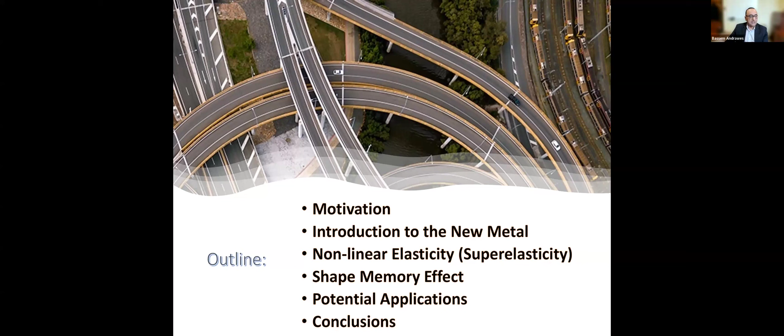Rather than focusing on one particular application, I chose to go through an overview of some samples of the work we have been doing through TRANS-IPIC, especially here at the University of Illinois, related to SMAs, which would hopefully give you an idea about the potential of these new materials. Then I'm going to wrap up with the conclusions, of course.

Starting with the motivation, really the motivation is the dire condition of our transportation infrastructure. It's no secret that we are in need of reshaping the future of our infrastructure if we want things to be a little bit different a few decades down the road. The numbers highlighted here in red are just a few examples of the condition our infrastructure is suffering from. Therefore, we see buzzwords like resiliency, sustainability, energy efficiency, durability. These are keywords floating around whenever we attend a meeting, workshop, or conference, and they are very important keywords that we need to think about very carefully.

We need to think about innovative ideas and technologies for the future. Of course, we can't just keep repeating the same technologies and expect the outcome to be different 50 or 60 years from now. Therefore, we are thinking about new materials, and that's the area I'm going to be focusing on today.

If I ask you a simple question, what would be the most used material in our transportation infrastructure? I'm sure most of you will say concrete and steel, and you're not wrong about that. You're absolutely right. However, these materials are great and have served us well over the last century, even more. But it's not a secret that they have their own shortcomings and limitations. For example, concrete cracks in tension, steel corrodes, and concrete cracking even exacerbates the issue of steel corrosion.

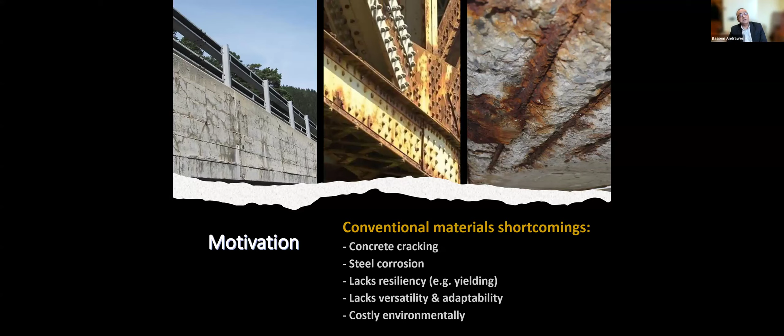Therefore, we started thinking about emerging and new materials like shape memory alloys. Let me declare very early on in my presentation, we are not suggesting or proposing to replace existing reinforcement with these metals or materials, but rather supplement reinforcement with these materials. Hopefully the examples I'll share with you today will highlight exactly what I mean by that.

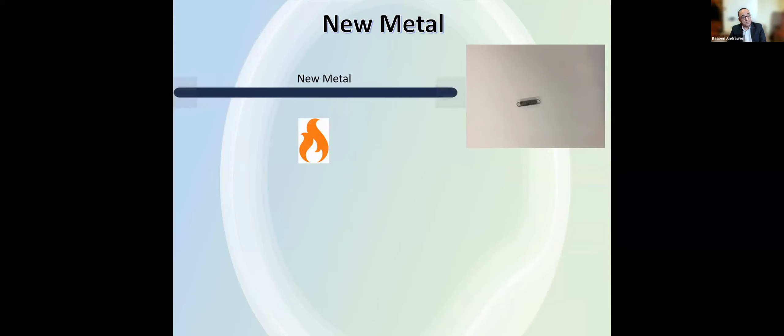So when we say new metal or SMAs, if you see it, if you feel it, it looks like any other metal. However, the unique thing about it is that if you deform it beyond its elastic range, the material can actually remember its original shape when subjected to temperature.

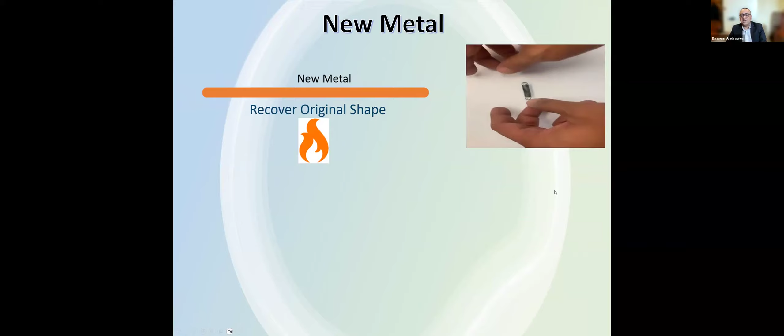If you haven't seen this in real life, I have a video here today that shows me stretching a spring made of SMA beyond its elastic range. You think it's permanently deformed. However, wait until you see what happens when I subject it to some heat through this flame. It immediately starts recovering its original shape. The thing about it is that it can do this over and over again, the same spring, so it's a repeatable process.

SMAs are not new. They have been out there, used in high-end fields for decades now—fields like aerospace, biomedical, robotics. And they are becoming more popular than ever when it comes to their commercial availability. They are found in the form of wires, bars, sheets.

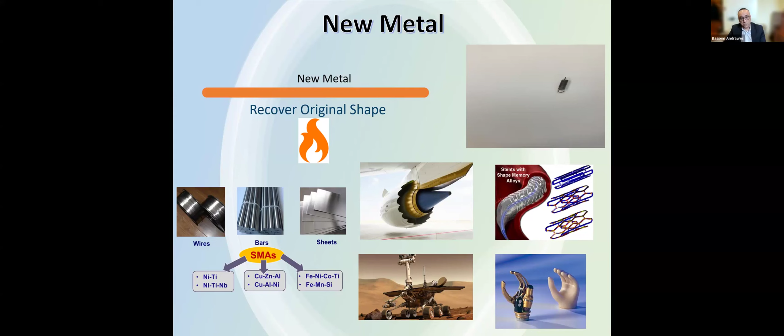One important thing I want to point out is that SMA is not one type of material. It's actually a group or family of materials that exhibit more or less similar behaviors. For example, we have the nickel titanium family, which nitinol comes from—the most popular commercially available alloy out in the market. And now we also have copper-based alloys, iron-based alloys, which really got civil engineering folks excited about using SMAs because they are more cost-effective. Our role here in civil engineering is to choose the right alloy, or alloys, that work for us in civil engineering applications, not only from cost, but durability and resiliency as well.

Let's delve a little deeper into the mechanical properties of these materials. First, I want to make it very clear that when you say SMAs, you have to identify what type of SMA you're referring to—is it superelastic or shape memory? They are completely two distinct behaviors that cannot coexist, by the way, and I sometimes see confusion about these issues.

For example, when you look here at the left side of the slide, you see this nice flag-shaped hysteresis—that's the superelastic behavior. There is what looks like a yielding point, there is a plateau, there is ductility, there is energy dissipation. But when you remove the load, the material bounces back and goes to zero strain, giving us this nice flag shape hysteresis. Some people refer to it as pseudoelasticity or superelasticity. I sometimes like to refer to it as nonlinear elasticity.

We're used to the terms linear elastic or nonlinear plastic. Nonlinear elastic is not a very common term to use, but this is actually what it is. It has all the features from damping to self-centering to ductility that excite earthquake engineers and researchers studying and using it, and that's what it's very popular for. So most of the studies out there you'll find on that type of alloy are for earthquake engineering applications. The less studied one, but now there's growing interest in using and applying it, is the one on the right here.

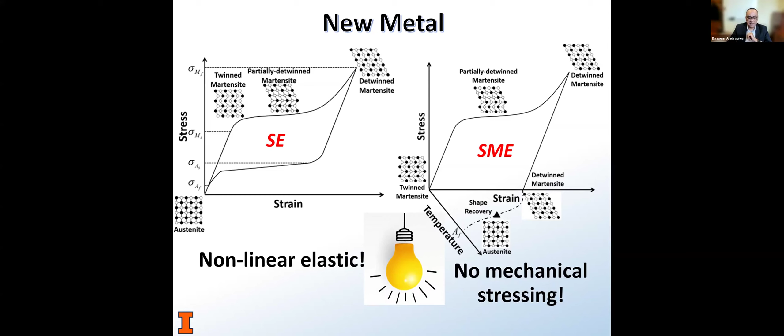The great thing about this, though, is that if you subject it to that temperature while restraining it, it will pull back very strongly, trying to remember its shape. That force developed during this pulling process is called the recovery force or the recovery stress. It really triggered in many minds the idea of using it for pre-stressing, thermal pre-stressing, without need for hydraulic jacking or any anchorage system. That's the unique thing about this, and hopefully in the examples I'm going to be showing you today, you will understand what I mean.

Going back to the superelasticity, for those who are not sure about the self-centering capability, what does this mean? This is a simple beam. We're subjecting it to bending. It has two SMA superelastic bars inside. Look at the crack forming in the middle.

That's expected, of course. But wait until you see when we remove the load, because it's cyclic loading, the crack will start closing. That's what we mean by self-centering. The beam is actually having the ability to recover back to and bounce to its original shape. See how wide the crack opens? You think it's done, but when the load is removed, watch the crack - it's closing. That's the beauty about the self-centering or recentering.

You also look here at the CMOD, that's the crack mouth opening displacement. It started taking that nice flag shape hysteresis. Eventually it failed in shear because we didn't actually plan to design it to have shear reinforcement. But you got my point.

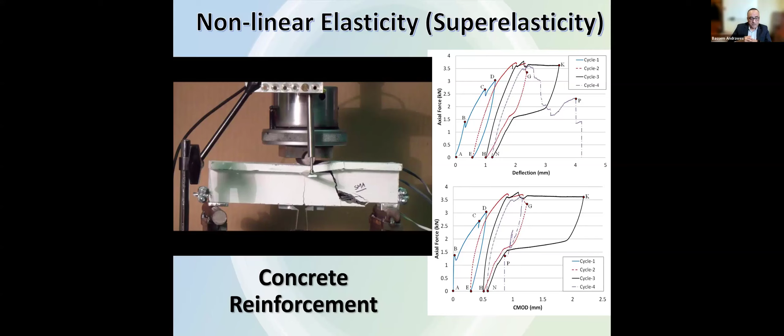So self-centering has found its way in applications like rebars and plastic hinges for bridge piers, or in moment-resisting frames, or even bracings for seismic frames. You will find a lot of research in that direction.

Switching to a little bit less studied and less understood phenomenon, the shape memory effect and how it could be used for thermal pre-stressing. Let us start with bridge piers. I'm showing a few examples of issues we have seen in the past, either during earthquakes or even issues with the construction of seismic structures, like high steel congestion. A lot of these problems could be attributed one way or another to the transverse reinforcement.

Now let me ask you this simple question. Can you imagine having a transverse reinforcement like a spiral, for example, or a strip inside a beam that is pre-stressed? How can you even start thinking about pre-stressing a spiral inside a column? Well, it's very difficult, and even if it's achievable, it's not a very simple process - until we started thinking about the thermal pre-stressing that we can use for doing that.

The process is very simple. We have pre-strained wires or bars made of SMA, delivered already to the site in the pre-strained condition. You form it as a spiral, put it in the form, and cast the concrete. When the concrete sets, you can now activate it by subjecting it to temperature. It will attempt to shrink, it will try to squeeze the concrete, and that squeezing effect we call lateral pre-stressing, transverse pre-stressing, or sometimes active confinement.

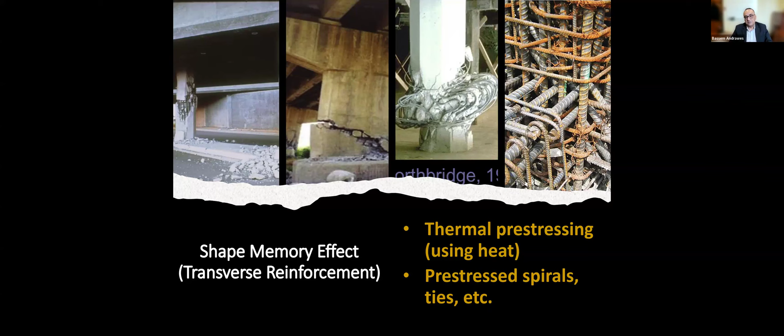So that is the unique thing about these materials. One could argue, how does active confinement really behave, or how does this differ from passive confinement, which is the conventional transverse reinforcement we're using? Well, I have this simple example here for you to compare both. We have two identical cylinders, identical in everything except that the wraps on the left are made of steel, and the wraps on the right are this SMA spiral.

So I'm going to run both of them simultaneously here. We conducted a cyclic compressive test, basically loading and unloading. I want you to start watching the progression of damage in both specimens. See here the shear diagonal cracks forming right away very quickly, and then boom, the fracture of the spiral.

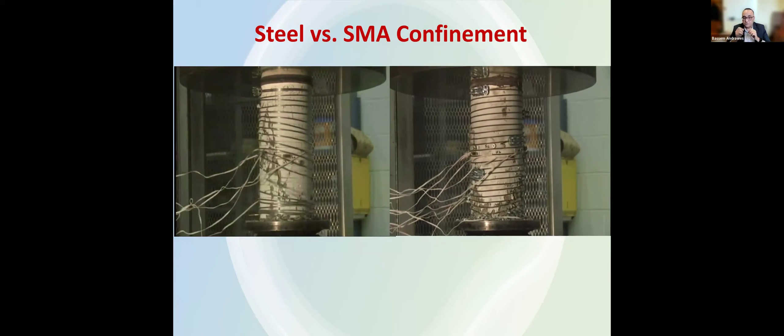While when you look here, I want you to watch the plate on the bottom just compressing, squeezing the concrete and unsqueezing - it's like a pillow. So before your own eyes, you can see the concrete being squeezed. Only a 2 millimeter diameter wire that you can wrap with one hand is able to do this to the concrete. By the way, this is not special concrete, it's just regular, normal 4 or 5 KSI concrete. The effect is significant.

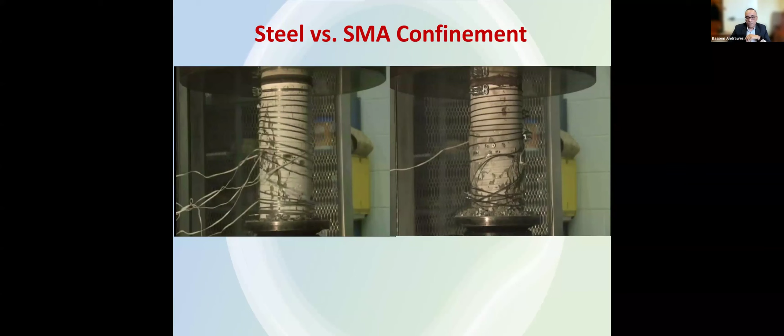There is some effect on the strength, as you can see from this stress-strain curve, but more importantly, the additional ultimate strain that we gained translates to additional ductility. So we wanted to look into this more deeply at the column level.

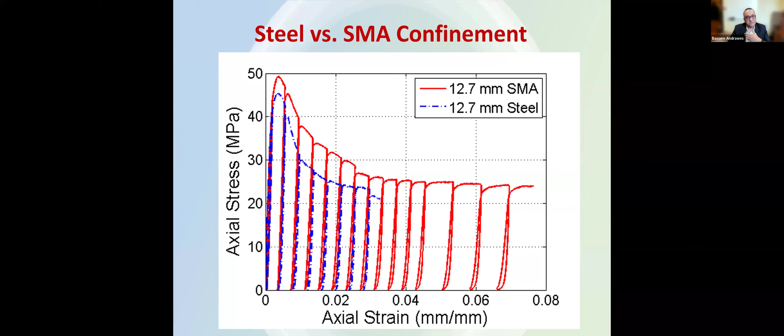We have two columns: the one on the left wrapped with the SMA spiral, again active confinement, and the one on the right with passive confinement using glass fiber reinforced polymer.

The FRP started well at the beginning. However, we started seeing early compression failures, crushing essentially of the concrete, and then what looks like an explosion at the plastic hinge of the columns.

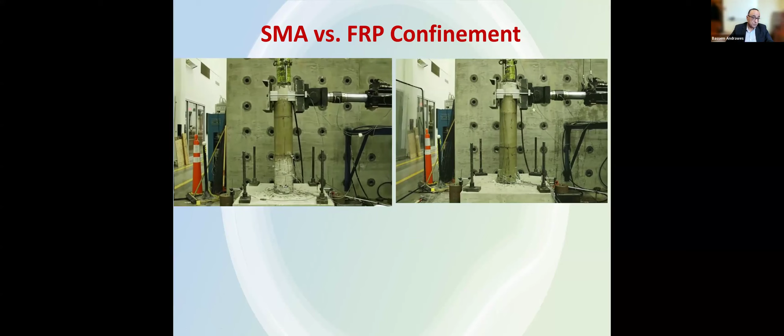While the one on the left, no matter how much we pushed it, we even maxed the stroke capacity of the actuator and still didn't see any fracture of the spiral or crushing of the concrete. That was an amazing amount of ductility that this column exhibited.

When we uncovered the columns and took all the wraps off to inspect the concrete underneath, for the FRP column almost half of the cross section was completely gone and unusable. While the one on the left had damages, it was in much better shape, which will affect post-earthquake functionality, repairs, downtime, and all the important decisions that bridge owners have to make after an event like an earthquake.

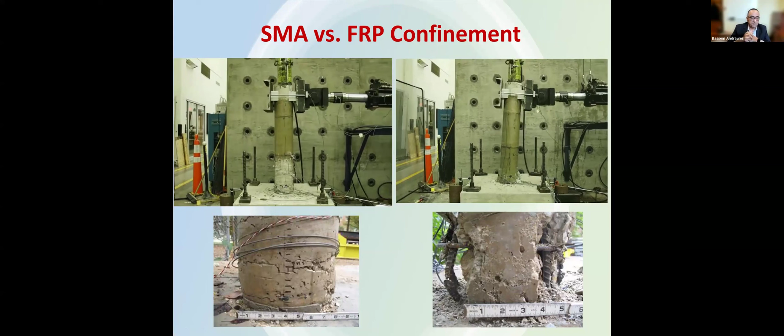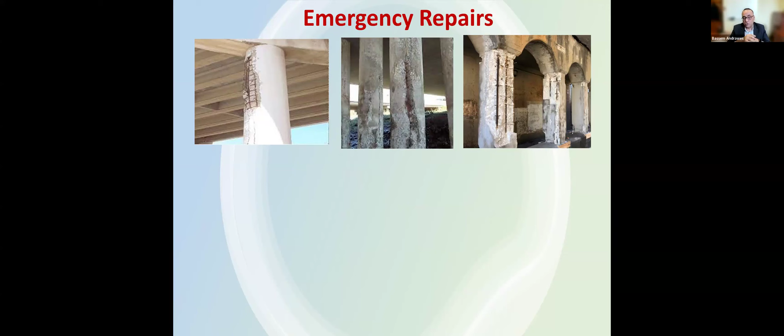Speaking of repairs, we started thinking about using these materials not for permanent repairs, but for emergency, quick, even temporary repairs after events like earthquakes or hurricanes. We know that requires a very quick act. So we wanted to test this concept in case a main shock hits a bridge and damages it, and you're not sure whether to keep it open for emergency vehicles or close it. We tested this with small SMA wires.

We had one of our bridge columns tested in our lab, severely damaged, with two of the rebars even fractured. So we coupled it with two couplers, injected epoxy in the cracks, applied fast-setting mortar, and then wrapped it with SMA at the plastic hinge zone.

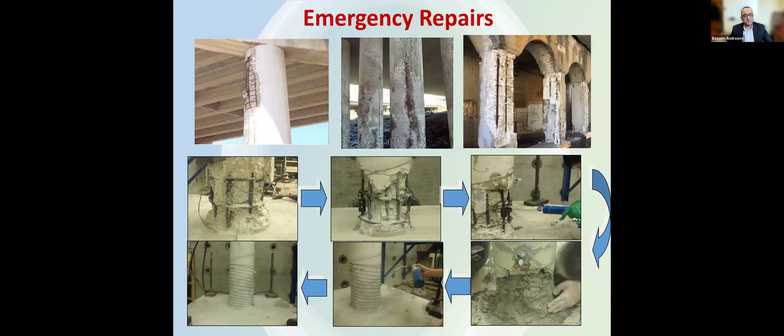Here my former student is applying a blowtorch, just heating it. In a matter of seconds, you see the spiral, even before your own eyes, attempting to squeeze the column and apply the confining pressure. So we wanted to test this concept under actual dynamic load effects.

The best way to do this is through a shake table test. That's actually the only way to do it right now in our labs. So we took one of the columns that was damaged, and the damage here is in the form of cover spalling and exposure of the internal steel hoops.

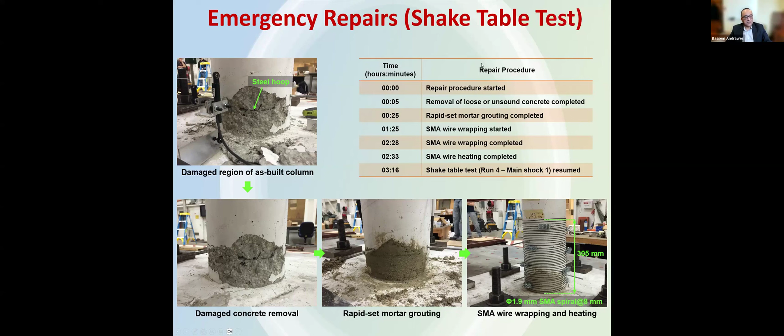We performed the repair process, and it took about 2.5 hours to complete. Then the column was ready for testing. We conducted tests on two columns at the same time. The top one was not damaged; that was retrofitted from the beginning. The bottom one, shown to the right, is damaged, then repaired, then tested.

We subjected both columns to a record, bi-directional record from the Loma Prieta earthquake. I want you to watch here how both columns behave together.

You will notice that both columns were behaving almost identically. The capacity of the damaged column was restored, and its ductility was improved significantly just with 2 millimeter wires in a 2.5 hour repair. That was a great successful test, showing the potential of these materials for active confinement.

Let us switch gears a little bit and talk about another important component in bridges: precast pre-stressed girders. One of the issues still lingering with these precast components is the transfer of the pre-stress and the effect it has on the end region.

We see in many cases, unfortunately, these end splitting cracks, especially in cross sections with skinny or thin webs and wider flanges where there's a lot of pre-stressing force transfer. There's been a lot of research in this area, so it's not a new problem, but there's no one quick 100% fix yet that satisfies everybody.

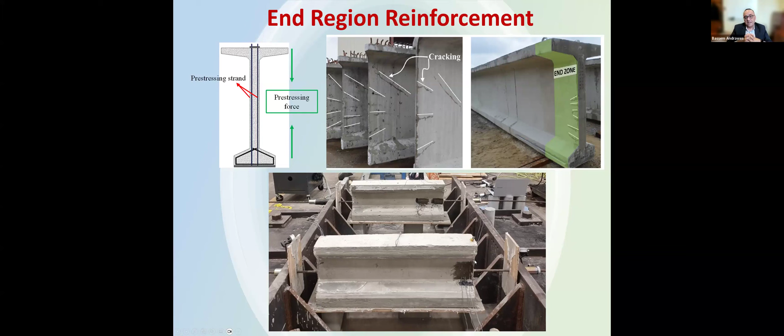We only used one stirrup, number 2 stirrup made of SMA, with 2 legs. We found that we are able to apply a transverse pre-stress that reaches about 0.9 KSI or so, which our analysis showed is enough to almost eliminate all the transverse or splitting cracks we see.

We are actually going to be presenting on this topic next month at the ASCE Structures Congress, and we're now pursuing more testing to validate this concept.

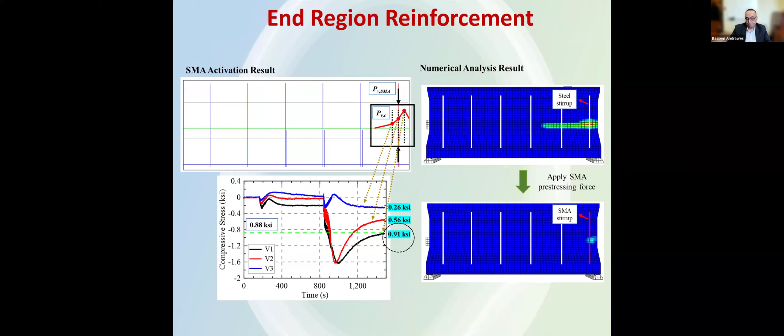End region is not only a problem during pre-stress transfer. We see this all the time in existing bridges, actually due to the leaking of de-icing material or water through the joints, the bridge hinges.

Now the question: should we replace the beam? Can we restore the capacity of the beam? DOTs and agencies, transportation agencies, are faced with these questions all the time.

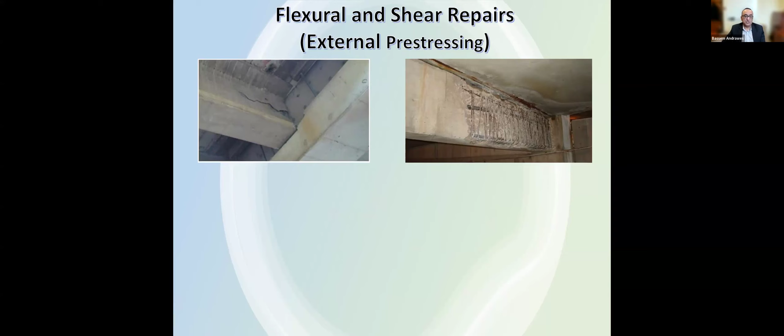External pre-stressing is one of the great techniques for restoring capacity. However, for a tight region like this, it becomes very, very difficult because of the need for large equipment, hydraulic jacking equipment, and even anchorage blocks.

So we came up with a very simple concept. It's called precast pre-stressing plate, the PPP concept, where we basically have a precast plate fabricated somewhere else, having a coil, if you will, of SMA that's pre-strained, not activated yet. You place it in that plate. You ship it to the site, you mount it or attach it to the surface of the concrete where it's needed repair or strengthening. For example, here it could be a web or it could be a flange.

It could be a very tight region because really you don't need any anchorage block or system. Once it's ready, you apply the pre-stressing force by just simply heating the wire inside the plate. The pre-stress transfers to the substrate or the surface underneath.

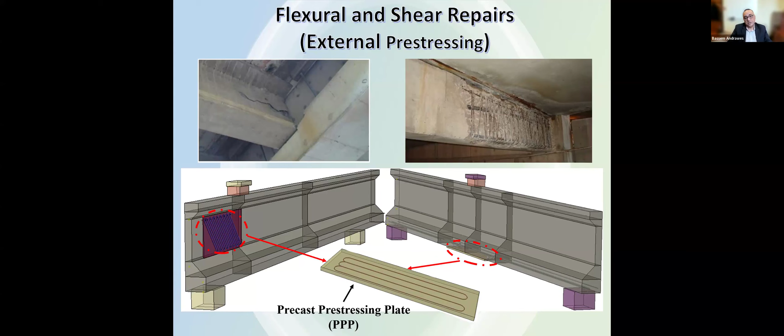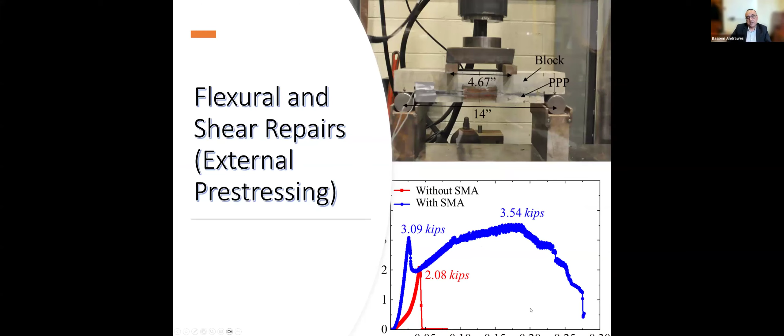When we activated the 4 wires, we found quite a bit of pre-stress transferring to the block underneath, and that was a very great outcome. We even tested that block in flexure, as you can see, and the strength and ductility both improved tremendously, showing improved behavior there because of the pre-stressing that's transferred.

The most recent test we conducted was a large-scale test using this same concept with some variations. It's called the coupled pre-stressing plate, or the CPP. And this, I would say, is the first test of that size, that scale, using SMAs done in the US.

Basically, the idea is very simple. We have here 2 plates. They are not connected, but they are coupled with the SMA reinforcement that's running in between them. And these are precast plates. We can also supplement the reinforcement with some steel just to cut down on the cost of the material of the SMA.

You simply attach these plates to the soffit, in this case of a PPC deck beam. Essentially, it's a box beam with some cracks in it, and we wanted to repair it, strengthen it, essentially. So here we used epoxy with some anchorage applied as well.

And once it's ready, we just activated with the blowtorch, as I told you before. And in a matter of seconds, actually, the pre-stress is transferred to the bottom of the beam, and we were able to see cracks closing, and we were able to see an increase in the elastic capacity by over 50%.

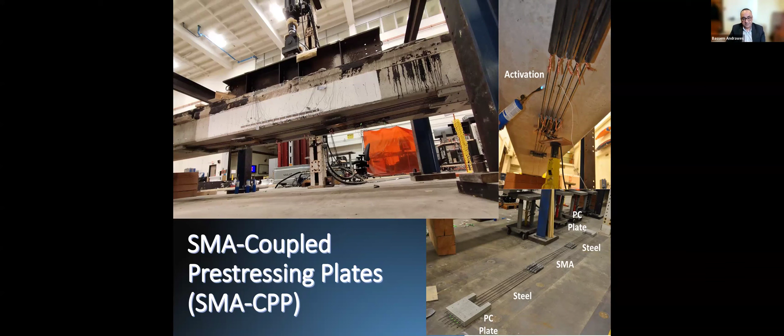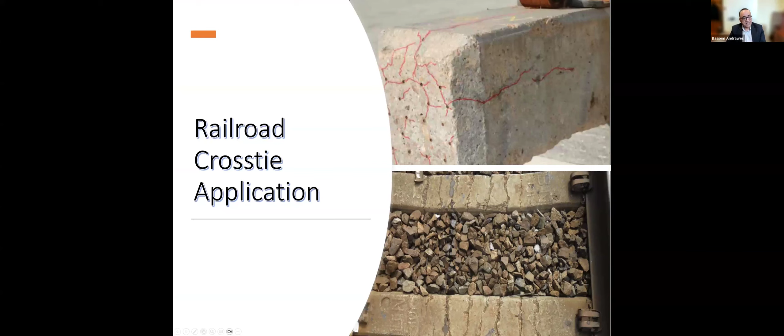So we started actually having discussions with experts in this area. Especially we started working with Rocla Concrete Tie, one of the leaders in developing these ties in North America. And we told them, how about if you eliminate the top layer of your post-tensioning wires? That will help, of course, alleviate some of the stress at the end zones, which will help with the end splitting crack issue that they have.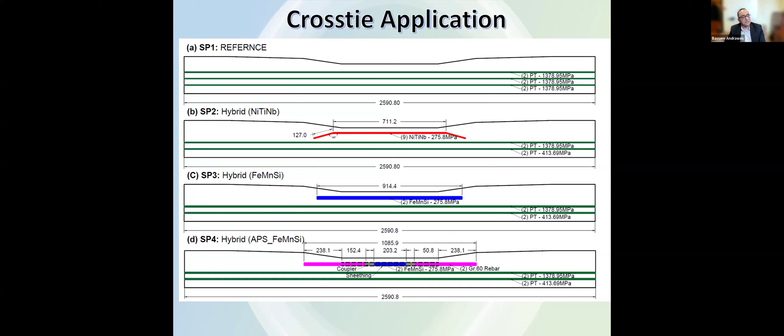And then we could also add just localized pre-stressing using SMA bars just at the center region. We tried different configurations. We visited their plant in Florida for a couple of days, and we worked with them on implementing this technology in their ties. And once the concrete was cast and set, they shipped it to us for testing.

It was very, very fruitful, an exciting experience we had with Rocla Concrete Tie. Now, the question that probably some of you might be wondering about is, okay, now you have the SMA inside the concrete, everything is great, but how are you going to heat it up? The quick answer will be, well, we're going to have some cables just connected to the SMA sticking out of the forms. And when we need to heat it, we just connect it to a power supply and electrical resistivity will do its job, right? Yes, but we wanted something that is less complex and much simpler.

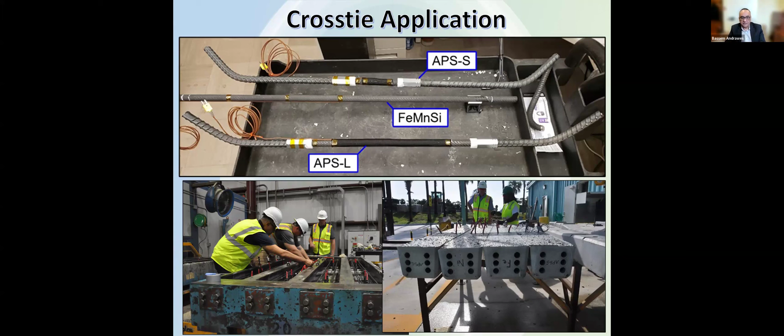And we thought about induction heating. Some of you might be familiar with this technology. The idea is very simple. You have this coil that generates an electromagnetic field. And if a magnetic metal happens to exist in that field, then it will actually run a current in it, and that will heat up the material. So we're able, for example, just by scanning the top surface of this concrete block, to heat the bar inside and make it reach about 200 or 300 even degrees Celsius in a matter of a few minutes.

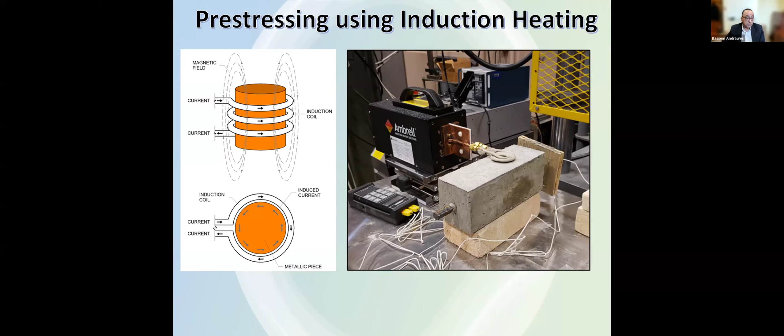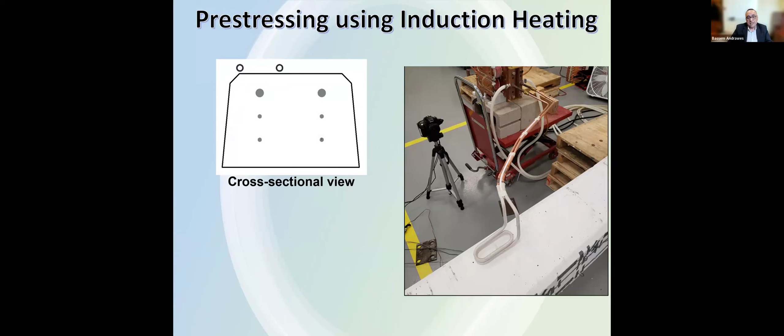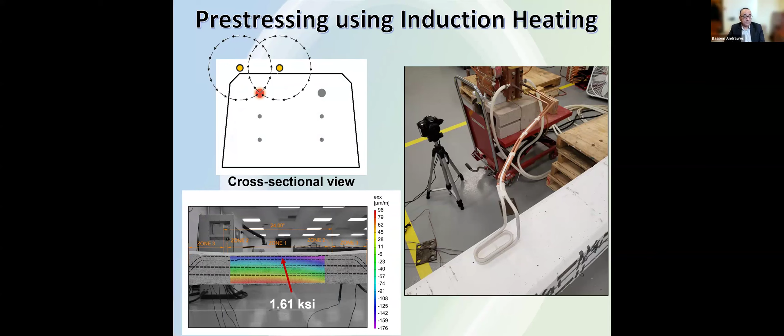So that was an exciting technology that we wanted to explore in TRANS-IPIC. And what we did was basically we heated the SMA inside of these ties with this coil. We were able not only that, but just by scanning the top surface of the concrete without even touching the SMA inside, to reach pre-stress at the top fiber as high as 1.61 KSI, which resulted in a moment cracking capacity that exceeds even the AREMA requirement. So that was a very exciting thing to see here.

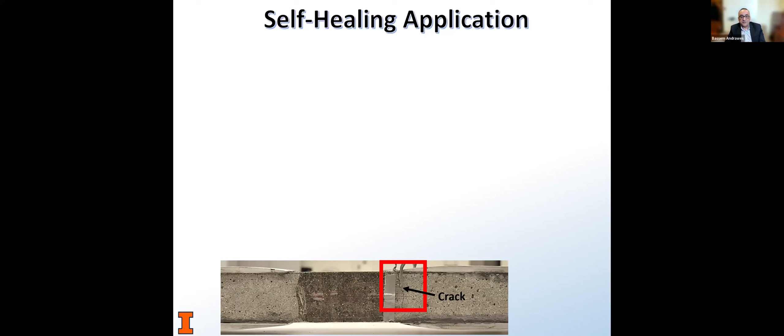The same concept could be applied for self-healing, something that we've been thinking about. There's been a lot of studies about this in other areas, but now with SMA, imagine having a crack of this size, and you have SMA bars inside. Whether it's pre-stressed or not, if you heat it again, that's what happens. This is exactly a specimen with SMA inside, and we heated the SMA, and some of you might not even see where the crack is. And that, of course, will help significantly improve the durability of concrete.

So our group will be giving a talk next month also at the ASCE Structures Congress in Phoenix about these self-healing applications and research we've been doing with SMAs.

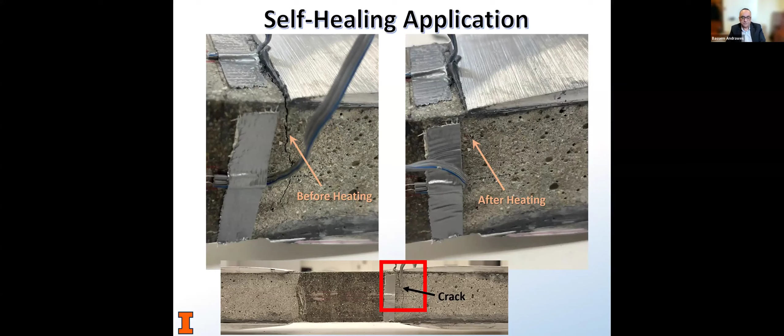The last thing I want to touch on, and I'm not going to spend much time because I know we're limited on time today, is design optimization using SMA pre-stressing. Now, in an era where 3D printing and additive manufacturing is growing significantly, showing us how we can produce more efficient and optimized cross-sections that used to be very complex to produce, we thought about applying this to conventional bridge girders like AASHTO girders, for example.

And with these zones being discrete like this, we cannot apply our conventional post-tensioning or pre-tensioning. But with thermal pre-stressing, it's becoming more and more actually feasible now to pre-stress these localized regions.

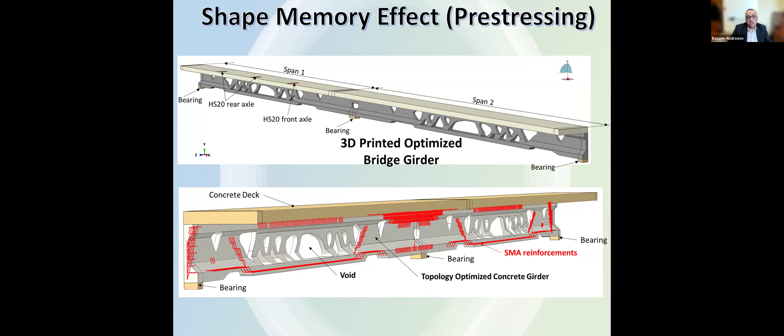So we wanted to try something very simple, a simple optimization process, the simplest form of which would be a truss. So we performed some analysis on trusses. And yes, trusses are more popular in steel than concrete for obvious reasons, simply because tensile members in trusses would have to crack if made of concrete, unless you pre-stress them, right? And pre-stressing each and every single one of them is a complex process.

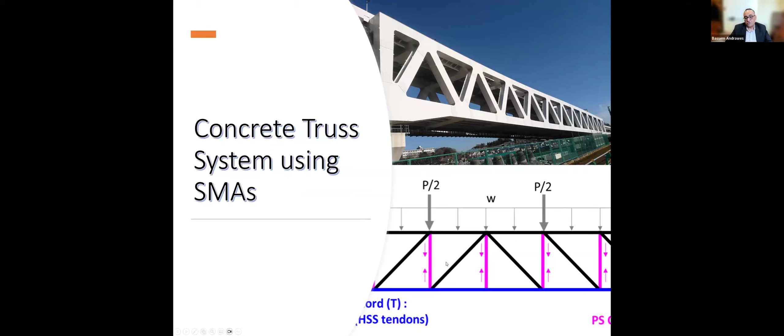For example, in a truss like I'm showing here, the verticals are subjected to tension, so you would have to pre-stress each one of them. With thermal pre-stressing, that's possible. So we conducted this theoretical experiment, if you will, on a truss like this with only SMA placed in the verticals.

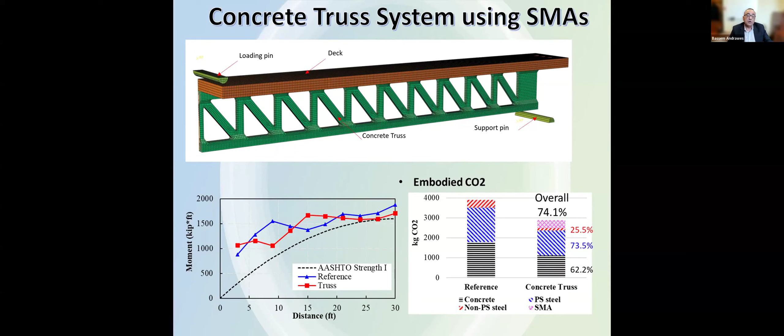The great finding was that we were able to achieve or meet the AASHTO strength limit states while still cutting the amount of material by over 25% and the CO2 embodied, associated with the production of these materials. So there is potential there, no question about that, and we are now working on validating these results experimentally.

In conclusion, SMA is a very exciting and new field that's emerging. It's a new material that we are not suggesting by any means replacing steel with, but supplementing reinforcement with it. As you can see from the examples I showed today, it could actually enhance the durability and resiliency of structures just by using a small amount of the material at the right locations.

The two exciting features of SMAs are the flag shape, the hysteresis, which is the superelasticity, and the shape memory effect, which we have been demonstrating how it could be used for thermal pre-stressing. As I said, this is a new field, and we're just scratching the surface here, and there is a lot of room for collaboration and for innovation.

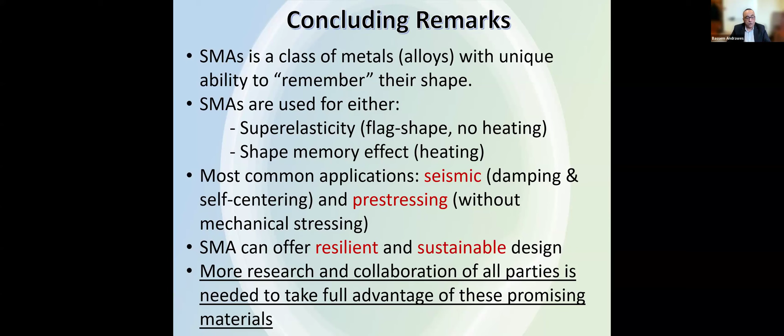With that being said, I would like to acknowledge the funding that we received from various agencies supporting our research in SMAs. In particular, I thank the funding coming through TRANS-IPIC and the UTC program of the USDOT. Without this support and funding of the UTC, we would not be able to take this technology to the next level or even do large-scale testing and implementations, as you saw today.

I can't end my presentation without thanking each and every single one of my former and current group members, from PhD students to postdocs who participated in this work, and some of the work that's shown today. Without their help and collaboration, I would have never been able to achieve that.

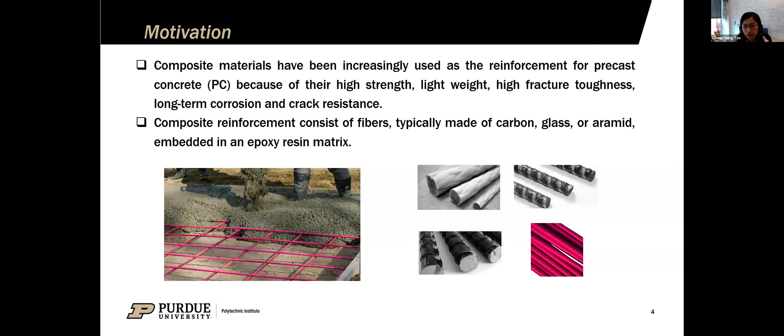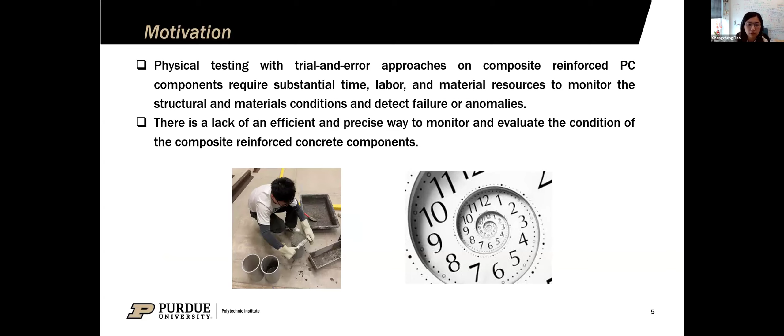Physical testing with trial and error approaches on composite reinforced concrete materials usually takes a lot of time, labor, and materials, especially when we want to monitor the condition of the material, detect failure and anomalies, and optimize the design of the system. So there is a lack of an efficient and accurate way to monitor and evaluate the condition of composite reinforced concrete components.

So my research objective is to develop a smart composite reinforcement in precast concrete for real-time health condition monitoring. In order to achieve this goal, we have 3 research components. First, we want to develop a smart sensor-based test bed for the composite rebar in concrete. Then we conduct multivariant numerical modeling of the composite reinforced concrete. Third, we integrate artificial intelligence algorithms to predict the real-time conditions and potential risks along the reinforced concrete component system. The diagram here shows the 3 research components, and I'm going to talk about them one by one.

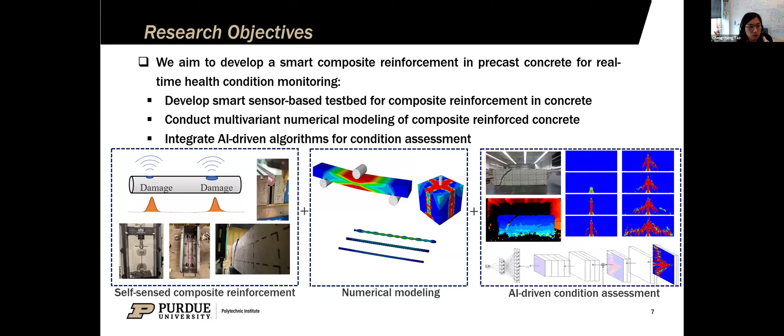And we have the micro measurement strain gauge attached on the rebar to measure the point strains as well. We also have the extra long linear strain gauge for concrete to measure the strain of the concrete. In addition to the smart sensors, we also have 4 image data collection devices, including GoPro, cell phones, drones, and DIC cameras.

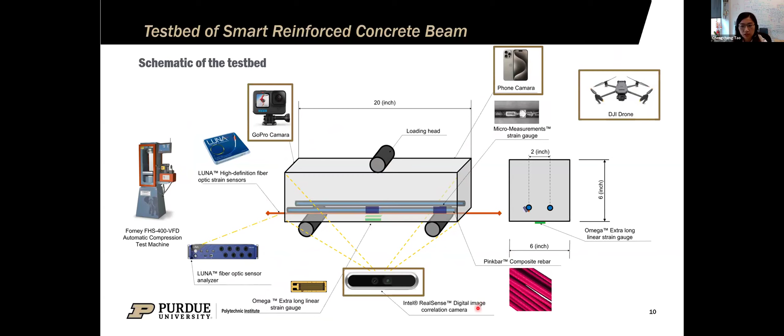The design of the flexure test is based on the ASTM C293 standard, with a total length of 20 inches and a span length of 18 inches. From the test bed, we are able to monitor and observe the material performance of the rebar and concrete in real time.

First, we started preparing the smart composite rebar by installing 2 types of sensors: fiber optic sensors and strain gauges. The distributed fiber optic sensors can measure the strain along the entire rebar, while the strain gauge can only report strain data at the points where we put the strain gauges. So we install the rebar strain gauges next to the fiber optic sensors so that we can compare the results from the 2 sensors.

Since the fiber optic sensor cable is very slim and delicate, we need some way to protect the cables. We have 2 ways here. The first is we create a groove on the composite rebar, insert a silicone tube in the groove, and put the fiber optic sensor in the tube. The second way is we use a thick layer of epoxy coating and attach the fiber optic sensor cable on the rebar using the epoxy coating to protect the fiber optic sensors.

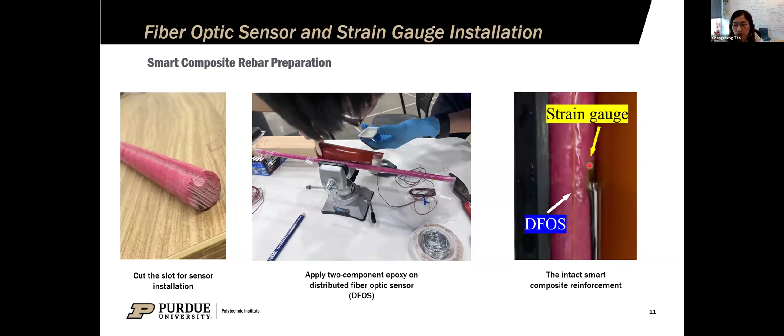Before we put the smart rebar into the concrete, we want to make sure the sensors are installed well and the signals can be captured successfully. After the fiber optic sensors and strain gauges were installed, we made reinforced concrete beam samples using the mold, fixing the composite rebar with a rebar chair before pouring the concrete. We also added extra protection for the sensor cables at the edge area of the beam using PVC tubes. After several days of curing, we demolded the concrete beam.

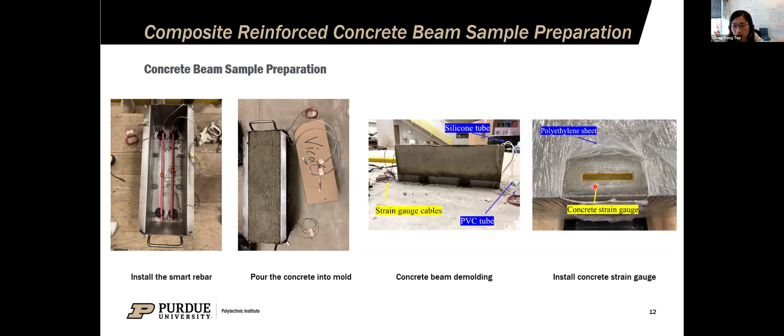In order to monitor the strain of the concrete, we also installed two additional concrete strain gauges at the bottom area and the front area to collect strain data from the concrete.

During the flexure test, we monitored the beam and collected strain data of rebars and concrete using a sensor interrogator in real time, and recorded images and videos using different cameras like a GoPro, cell phones, and DIC cameras. We plotted grid lines on the beam because the configuration of our compression machine blocked the front area, so we could only record videos and images from the side view, using the grid lines for image processing later.

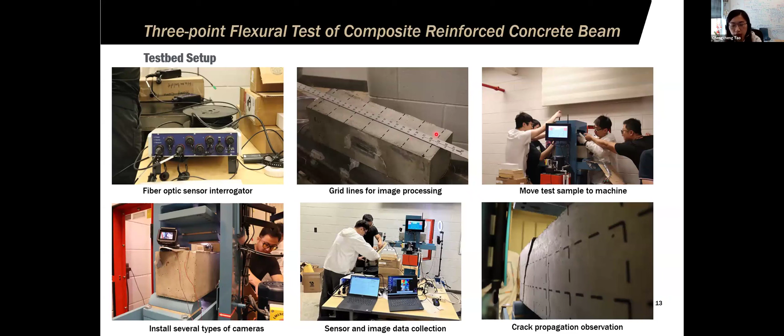Here are the sensor data results collected from the fiber optic sensor and the strain gauge. We compared the strain data of the two rebars and the sensor data collected by different sensors. Since we have two symmetric composite rebars in the bottom area of the concrete beam, the sensors on the two rebars should provide the same values, as shown in the first two figures. The strain measured by the fiber optic sensors matches quite well with the strain measured by the strain gauge at the same location, as shown in the third image.

The strain gauge and fiber optic sensors provided good results and captured the bending crack at 300 seconds and the shear crack at 600 seconds. The results also match the load displacement data from the compression machine and videos.

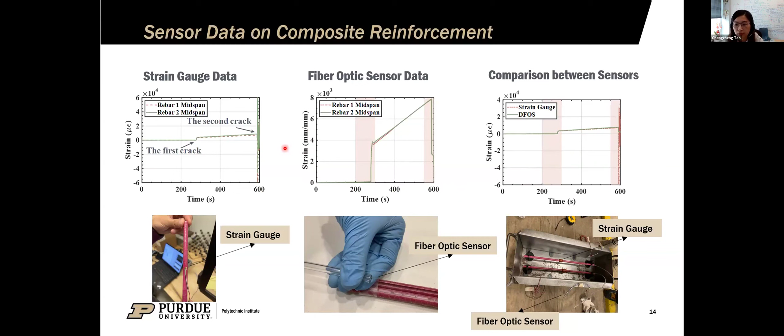As mentioned earlier, we have two protection strategies for our fiber optic sensors, like creating a groove on the rebar. We wanted to check if this groove affects the performance of the composite rebar, so we compared the rebar strain with and without the groove, and found the two results matched quite well. By analyzing the strain data, we found the slim groove doesn't affect the strain too much, so we can put the silicone tube in the groove to better protect the fiber optic sensors in the future.

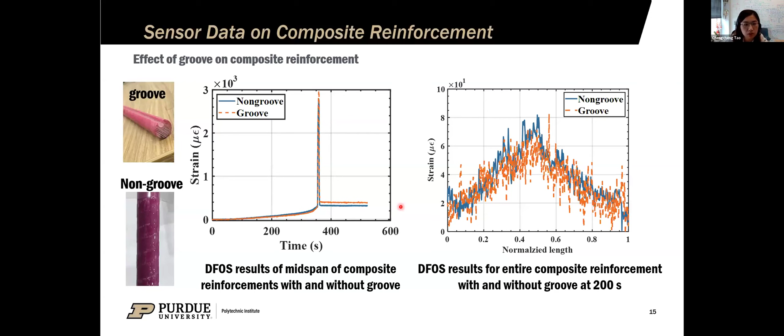In our current year 2 project, we aim to optimize the reinforced concrete components for better performance using the test bed developed in year 1. We want to analyze more factors like concrete fibers, water, type of rebar, and configuration of the system.

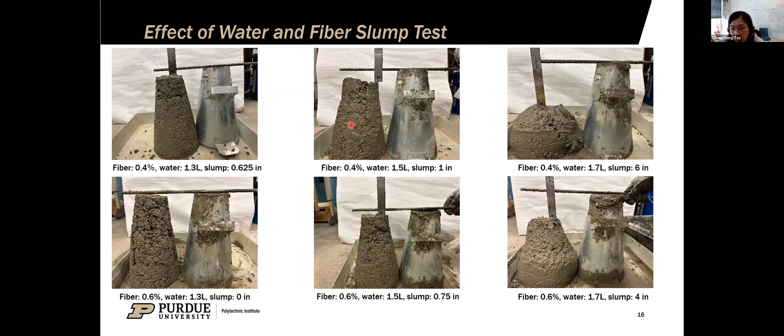Here is an example of the experimental study we are currently working on. We want to check the effect of fibers and water on the concrete performance and workability. According to the ACI 211 code, we conducted a series of slump tests on concrete with different fibers and water content to determine their effect on concrete. We will check more factors using more experimental studies this year and perform multi-objective optimizations on the reinforced concrete system.

For task 2, numerical modeling of the composite reinforced concrete: the data provided by physical testing is limited because each sample experiment takes quite a long time. We want to use a large dataset for optimization and condition assessment, so we definitely need complementary ways to generate the data.

Here we develop multivariate numerical models in finite element analysis. We study the effect of four different composite rebars, including AFRP, BFRP, CFRP, and GFRP. We also check the effect of concrete strength, from 5,000 all the way to 22,000 PSI, and the effect of the ribs on the rebar to see if they affect mechanical performance.

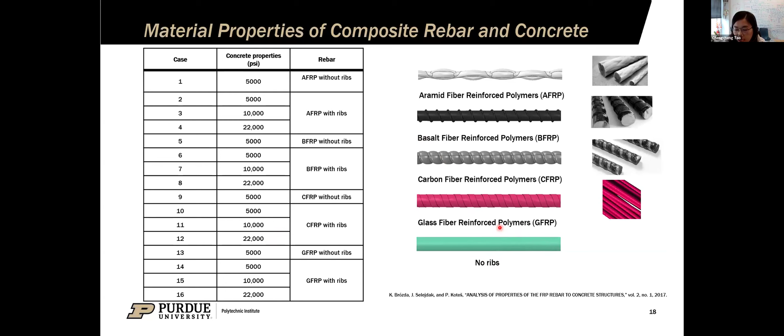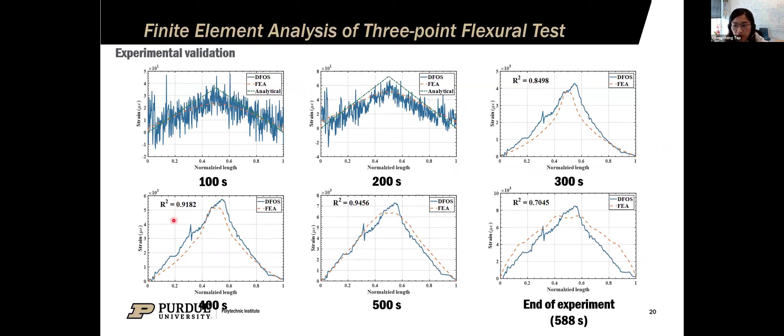After we finish the finite element analysis, we also validate our model result with experimental data. As you can see in the pictures, at different time steps, the result between the finite element analysis and the sensor data match quite well, with a very high R-square value, more than 0.9.

Through the experimental and numerical investigation, we developed a digital twin model for the reinforced concrete beam system, and we can generate a big data set for AI-based condition assessment and optimization.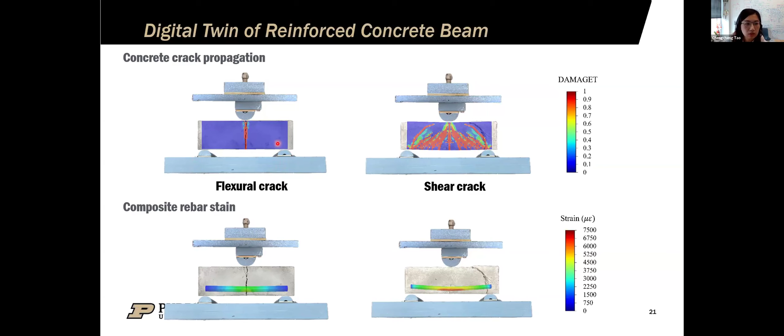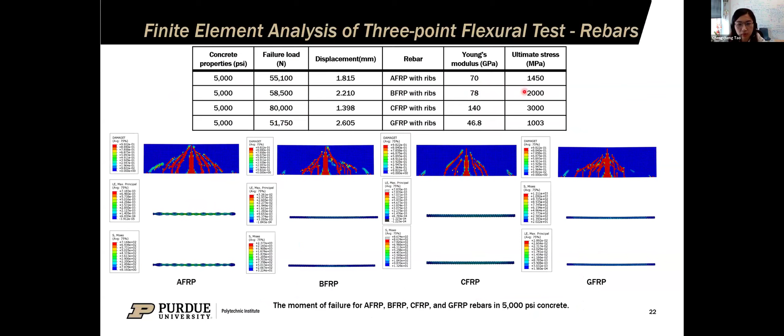So here are some more results, using the finite element analysis to generate a larger data set by considering different rebar types from AFRP, BFRP, CFRP, and GFRP. We also change the concrete properties and the rebar ribs properties to generate a very large database.

In year 2, we aim to optimize the reinforced concrete design by searching a larger database. We are expanding our material space by considering more factors like the rebar material. We use steel rebar in addition to the composite rebar, and also consider the steel stirrup inside the concrete beam, and do more FEA simulations here.

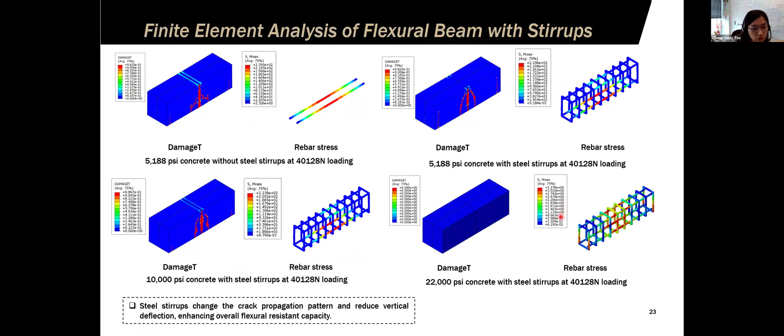You can see from the simulation result, the steel stirrups change the crack propagation patterns, reduce the vertical deflection, and enhance the overall flexural resistant capacities.

Also, we consider the effect of fibers in the concrete materials by changing different PVA fiber content in finite element analysis. With the increase of PVA fiber content, it reduces the vertical displacement and increases the concrete resistance to vertical flexural cracking.

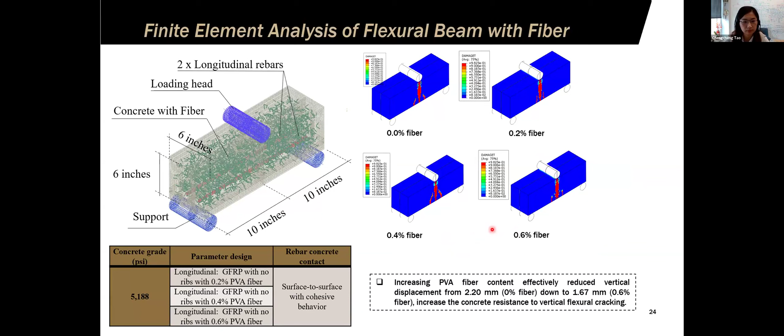In addition to the flexural test, we also conduct the pull-out test in finite element analysis according to the ASTM standard. We analyze the crack patterns from the pull-out test and compare our results with references. They match quite well from this study.

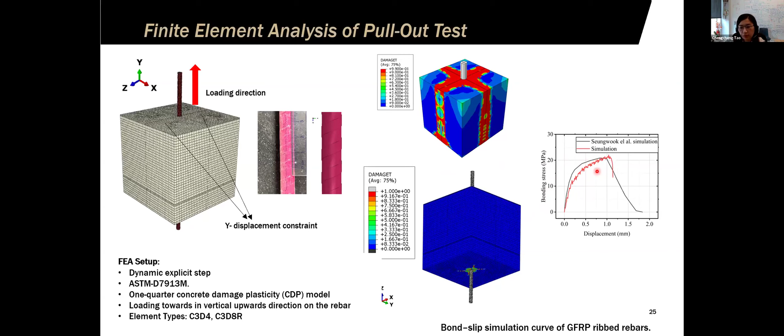So from this simulation, it focuses on the bonding behavior of rebar and concrete using the dynamic explicit analysis. The modeling results were validated by the experiment from the references, and can help us understand the bonding and cracking information between the concrete and the composite rebar.

For the third task, AI-driven condition assessment for composite reinforced concrete. After we finish the first 2 tasks, we have data from experiment, from sensors, and also data from the finite element analysis. We also have image data captured by different cameras and image data from finite element analysis.

We can combine and integrate all of the database and use those to train our AI algorithms to predict the condition at different locations and at different times.

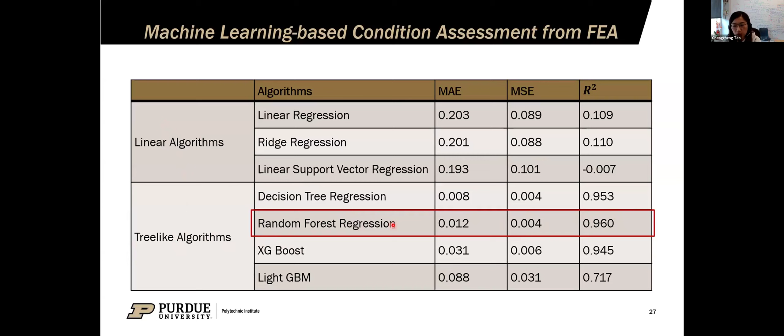First, we trained different machine learning algorithms with our finite element analysis data to see which algorithm has better performance. We found that the tree-like algorithms had better performance than the linear algorithms. Among the 4 tree-like algorithms, the random forest regression gives the highest R-square value. So in future training, we choose the random forest regression for our numerical and experimental data.

First, we want to predict the potential risk of the reinforced concrete beam on the 3-point bending test. As mentioned earlier, we use damage T data to represent the crack pattern and get the crack propagation over time.

Here we apply the damage T data from the FEA to train the machine learning algorithm, and the machine learning prediction matches quite well with the finite element analysis. From the machine learning model, we can predict the condition of the beam at different times and different locations, and give risk index maps accordingly.

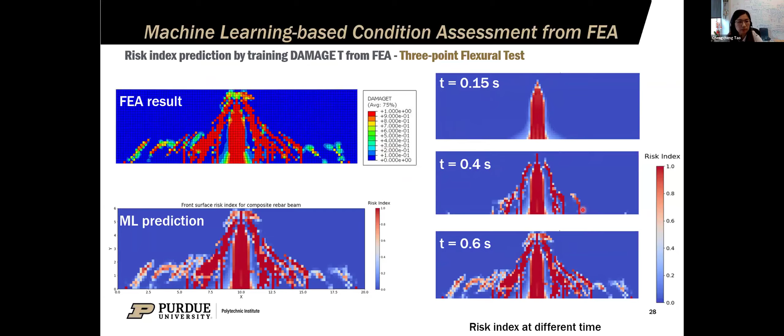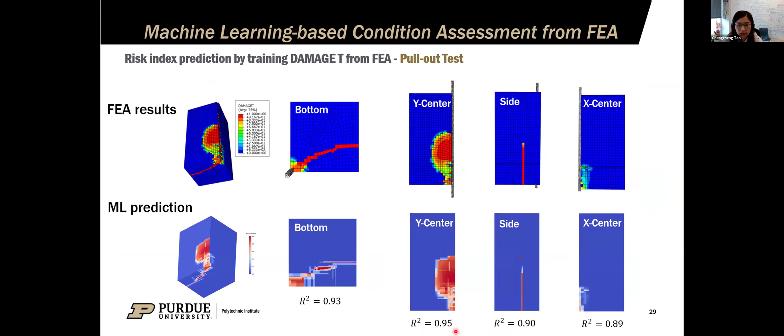We also use the pull-out test data from finite element analysis to train the machine learning and give a risk map for this pull-out test. The R-square value is quite high, it's more than 0.9.

As I mentioned earlier, because of the configuration of our compression machine, we cannot get the front view image data during the test. We can only get the side view data.

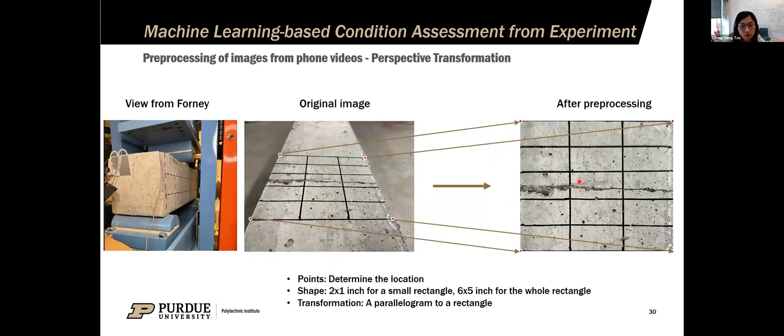So we plot some grid lines on the beam, and then we do the image processing before we train the images. We use an algorithm to convert the side image data to the front view image data. After we got those algorithms done, we can use those images to train our machine learning.

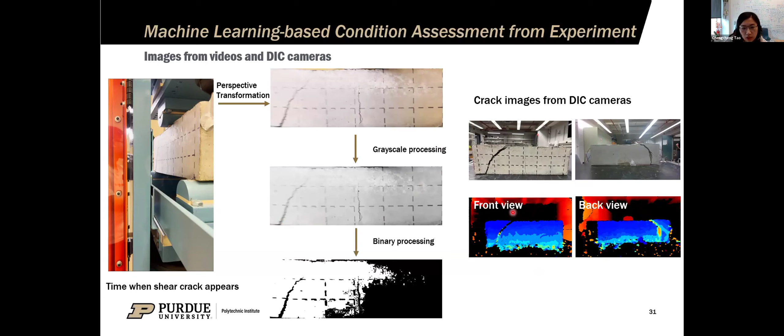Also, in addition to the images captured by the cameras, we also have images captured by the DICs, and we can integrate all of the images we have to train our deep learning algorithms.

So here is an example of how we use a deep learning algorithm to predict the performance of composite reinforced concrete system by training the image data. We trained the convolutional neural network algorithm to predict the strain in composite rebar using the crack images generated by FEA and also using the images captured by the cameras.

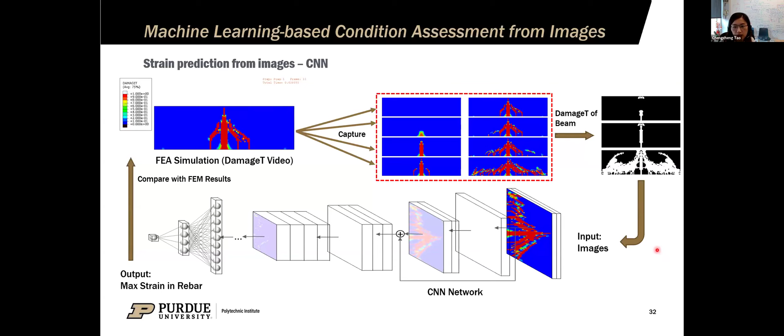We input them into the CNN network and output the maximum strain in the rebars. Here, we used two different CNN structures, LeNet5 and ResNet 34. LeNet5 is a relatively small model which has 5 layers and more than 60,000 parameters.

For the first structure, the R square value is about 0.9. We also used ResNet 34, a bigger model which contains over 20 million parameters, and it generates a higher R square value for the strain prediction.

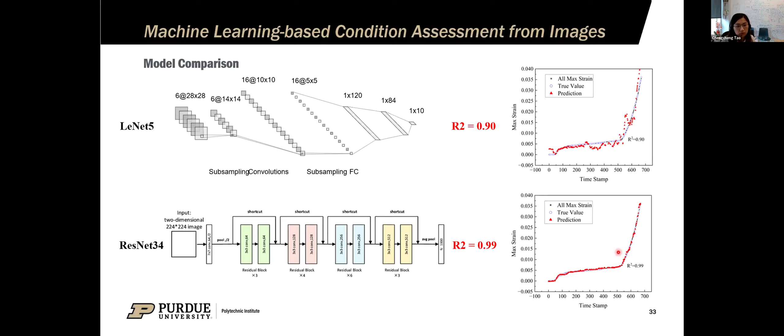So, conclusions. Based on our progress so far, we have successfully developed a smart composite reinforcement in concrete beam. We have conducted multivariant numerical modeling for different rebars and concrete materials. We also trained different AI algorithms for the condition assessment using data from smart sensors, cameras, and numerical analysis to predict the potential risk of the reinforced concrete system.

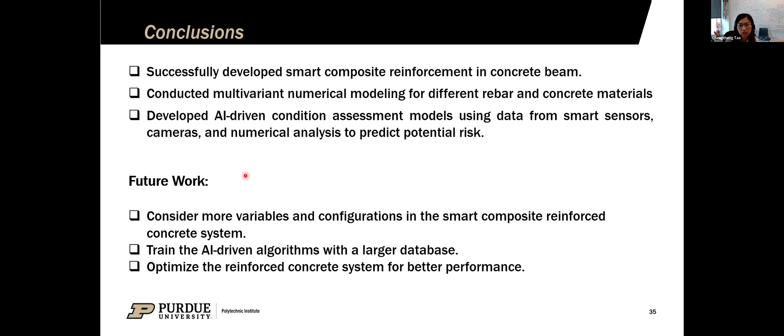In the future, we will consider more variables and configurations in the smart composite reinforced system and train the AI algorithm with a larger database. We will also do multi-objective optimization for the reinforced concrete system for better performance, like mechanical performance, sustainability, environmental performance, and also cost.

So here are our outcomes. So far, we have published one journal paper, and we have submitted 4 reports to TRANS-IPIC, 3 quarterly reports and 1 final report. We also presented our research outcome at the webinar last September and presented our research at the workshop last year.

And thank every student in my lab. Thank you everyone for your attention. I'm happy to answer any questions.